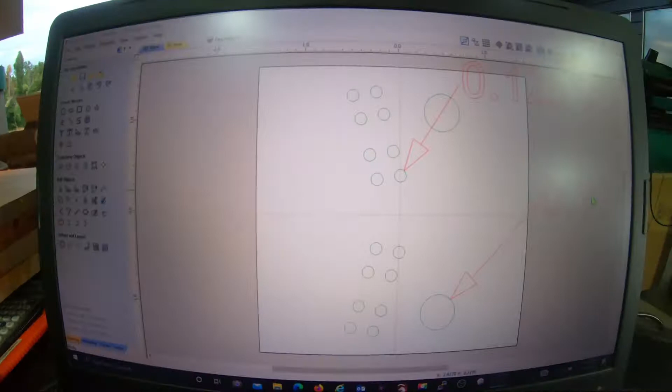Well, this might be interesting, but I'm attempting to build this cribbage board here, and it has a lot of little holes, and I'm also adding some magnets to the top. Now, this is a test cut, and these are 1/8 inch diameter holes, both sets of those, and the other is a magnet pocket. We won't talk about that right now, but anyhow, it's going to take a long time to...

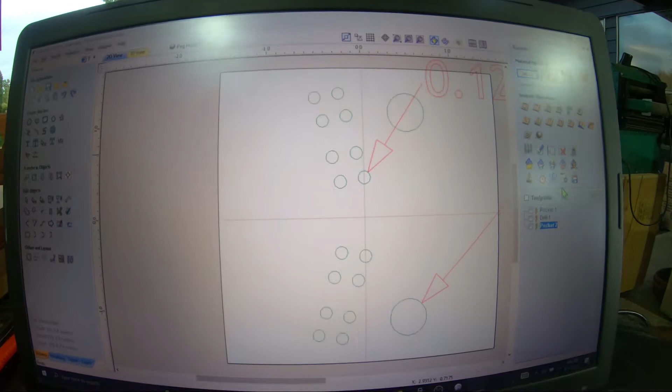Let me get this pinned up here. Let's see, is it this one? It's going to take about 6 minutes just to do those.

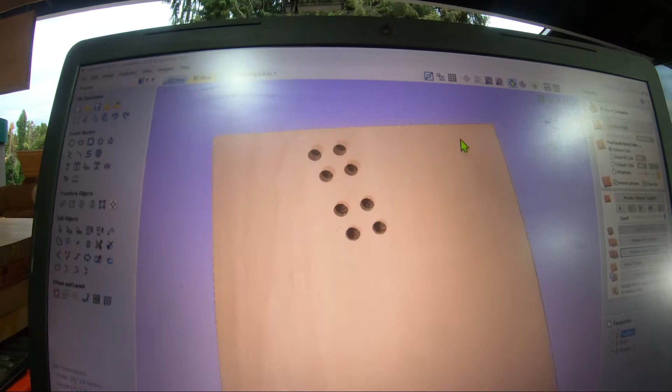And if you look at the toolpath preview, let me show the toolpath again here. Yeah, that's a lot of spirals.

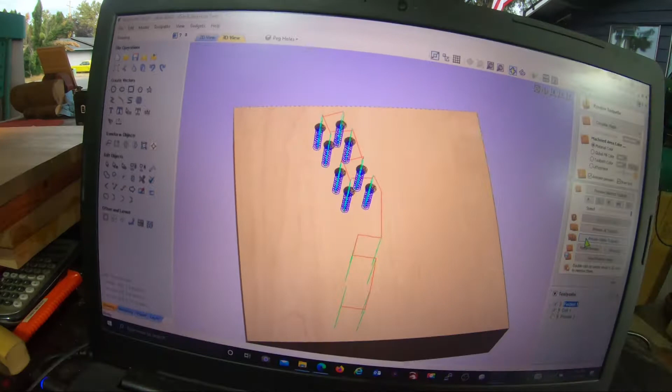Now this other one here is done this way, and I'm using it as a 1/8 inch bit to drill a 1/8 inch. Those are 1/8 inch holes, by the way. I got to use a 1mm router bit in order to profile cut that, because of course you can't use a 1/8 inch in that manner to create a 1/8 inch hole. So I'm going to tell it it's a drill, and all it's going to do is just peck. It goes in and out, in and out, in and out, like that, and it's done.

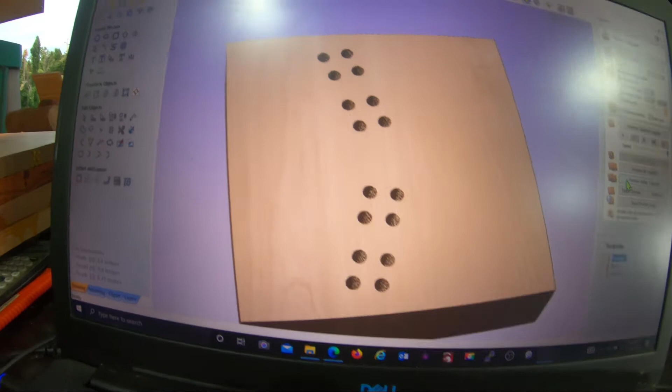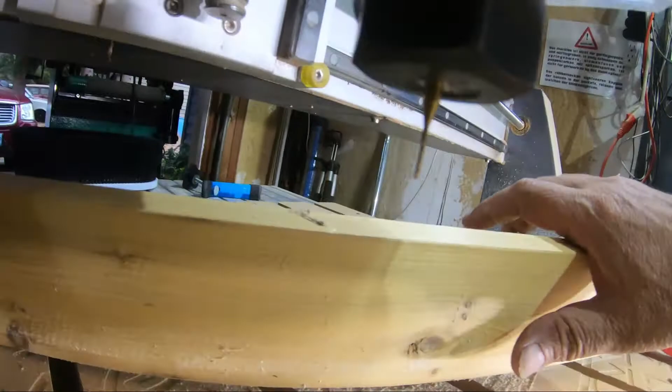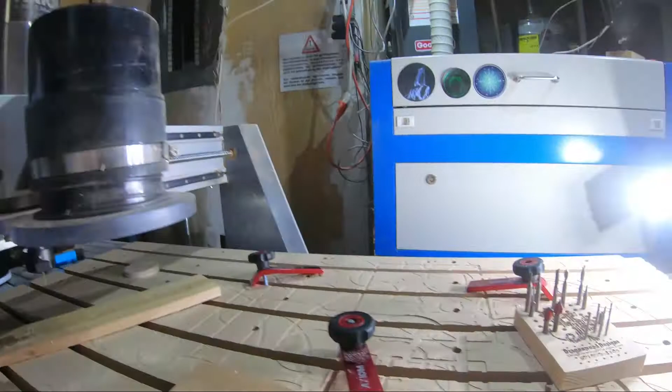So the interesting thing, and the thing that I decided I want to make the video is, let's see here. I don't know how well you can see that bit. Put something up behind it here. That thing is microscopic. That's a 1mm, and to give you reference, that's a 1/8, and there's a 1/16, and it's a little bit bigger than that 1mm.

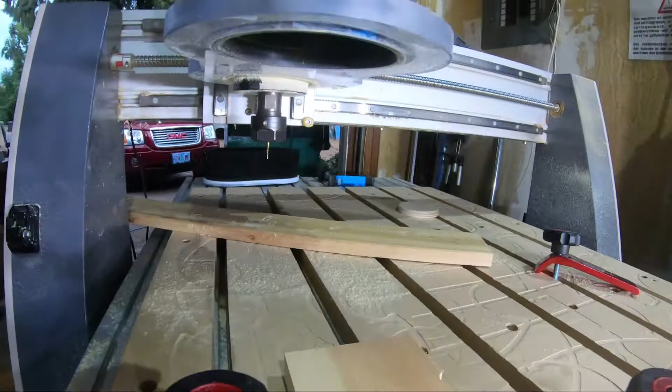But I got my little 3x3 square cut out. I'm going off the center, so it should put some holes in that, and we'll just see how that cuts and if it can do like 1,000 of them economically. All right, I'm going to set up and zero out, and I'll be back with you.

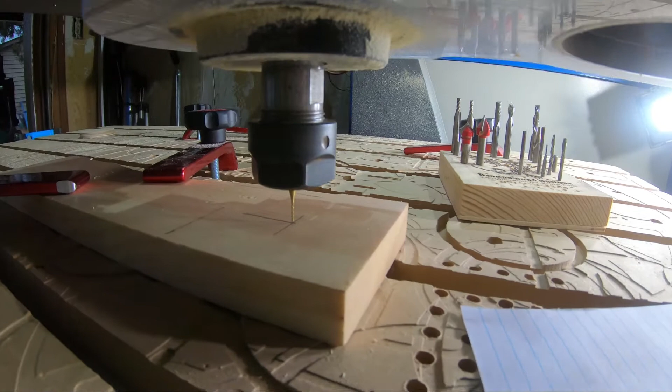Well, here's another little issue. Zeroing this bit. I remember the first time I used one, I went the wrong way in the Z direction, just a couple of notches, and it snapped that thing off really easy. So I'm not gonna mess with that. That's the automatic touch-off device, and I think if I get an old bit or something, I might try it, but it hits that thing. It makes a little thunk, so I don't think that bit could take it.

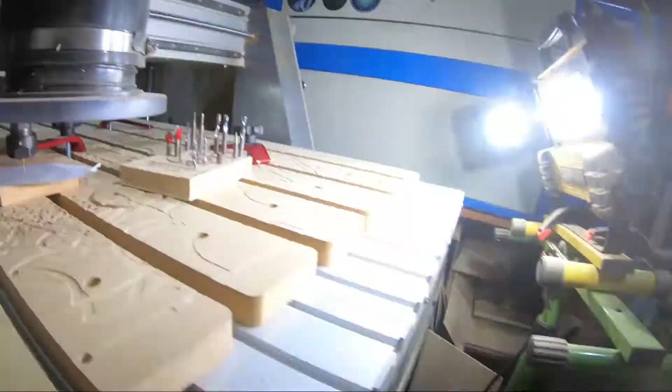So what I'm going to end up doing is sliding a piece of paper under that, coming over here, and switching—see that little F next to the SB. I'm going to switch. That's 1/2 millimeter per step. So now I'm 1/10 of a millimeter per step.

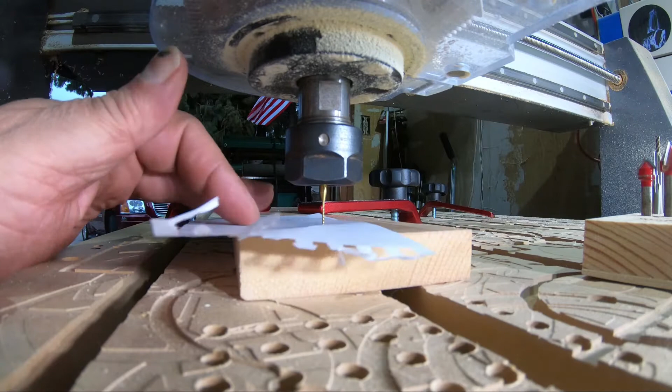So I'm going to set this guy down right here. Hopefully you can see. And drop that down 1/10 of a millimeter at a time until it pinches the paper. Almost. Ah, there it goes. I'm going to call that 0.

Alrighty, back to what I was doing. And I actually think it's ready to go. Alright. Let's see here. I need to check the files and make sure I got the right ones here. I'll be back.

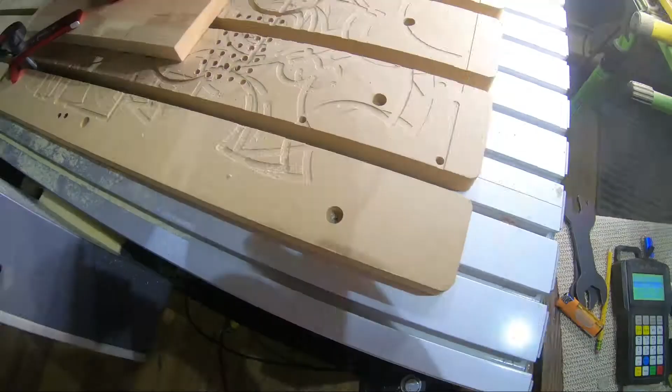Alright, here we are. That's the file, 1 millimeter, and let her rip. Wonder what's gonna happen.

Do that for a while. Alright, there's the first set of holes. That fits in there just fine. It's not tight, not too wobbly.

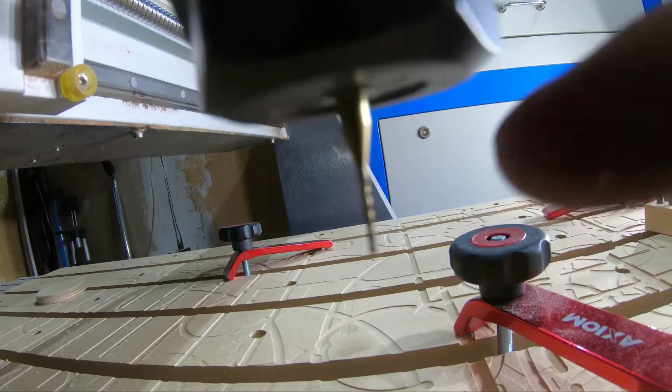Alrighty, there was an issue. The shank, there wasn't enough meat to drill 0.35 down. It probably ends at 0.30. So the top of each hole has been rubbed by the edge of the bit.

I'm going to put it side by side here with the 1/8 inch bit, which I'm good with, which is what size holes those are, and compare the two. Okay, there's the 1/8 inch next to the 1mm. Both of those have to go into a collet that takes them up to 1/4 inch. This is what the spindle I have is.

Alright, this is the 1/8 inch bit, and we'll be doing a drill pattern, which is a pecking, just straight down. First we zero. I always love that part. That little thunk, I wonder if that little tiny bit would have taken that. Alright.

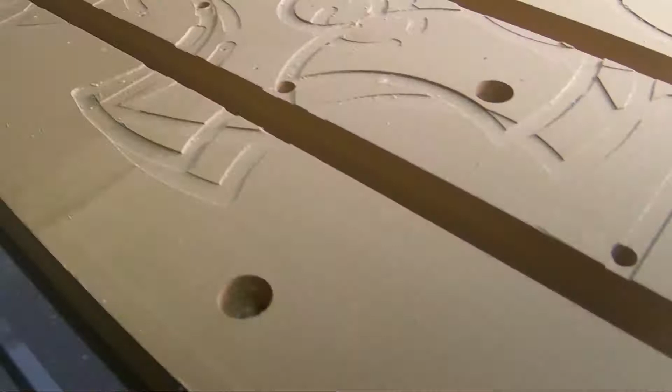There we go. And there we go. Wow, that was pretty fast. They still fit. Yep, feel it—sand on it, sawdust in there. Oh, that'll work. Alright, and while I'm at it, the magnets.

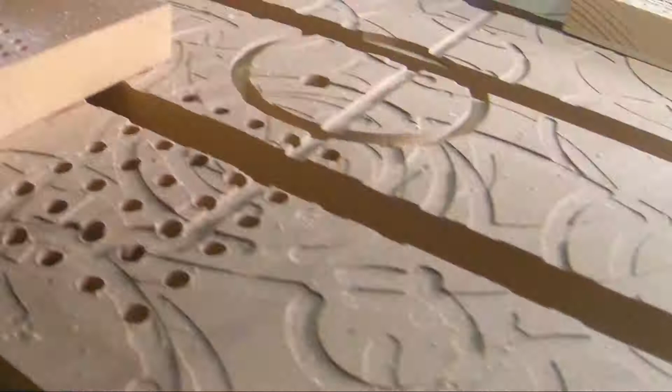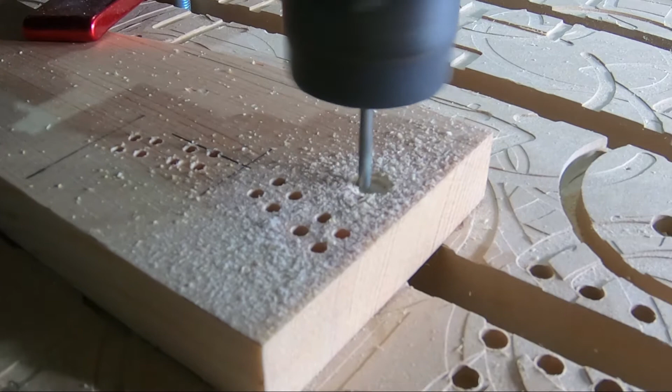Let's see here. For the last one. And that should run off that bit. See if that works, and move things around and see what happens.

Well, there's the magnet holes. I made 2 sets of those because I want to stick them together. Seem just a little bit proud, so I'm going to do another set right next to it that's 5 thousandths deeper. So anyhow, fit in there okay.

Oh, there it is. Got them super glued in there. Got the polarity right, so not too hard to pull apart, and oops, it goes on either way. There's that. There's that. So that's what that ended up looking like.

That's how many different tries it took. Let's see, yeah, I guess that's the majority of it right there. So anyhow, instead of 0.08, which is the battery thickness, I put it at 0.085 and I ended up at 0.095. And it's just a hair, maybe 1 or 2 thousandths below the surface. Feels like a very slight indentation. I didn't want the metal touching each other because then it's too hard to get apart. So anyhow, we'll just mark that down to, that's how that's done.